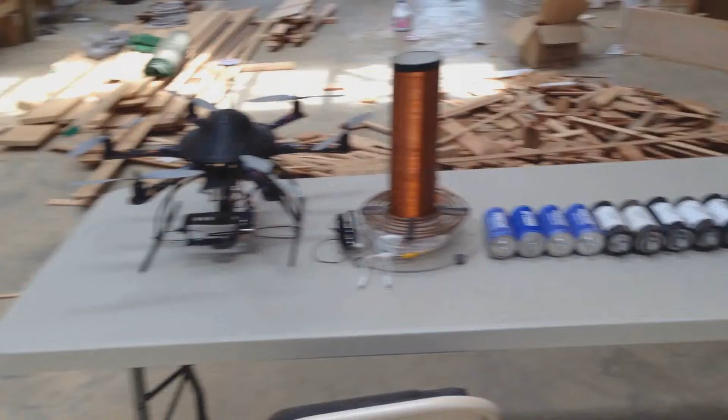Okay, so I'm really excited about this workspace here. There's a couple bays that I've got inside here, and I'm sharing this building with some other guys, and they're all great guys. The guy on that side of me, he wants to build solar on it over there. There's another guy here who builds organic farm tools to help with organic farming, and he's got all kinds of machinery and metal CNC machines, all kinds of stuff back there. But this is the space I'm setting up to work in. And I'm really excited because I've really been needing some workspace like this to take my projects to the next level.

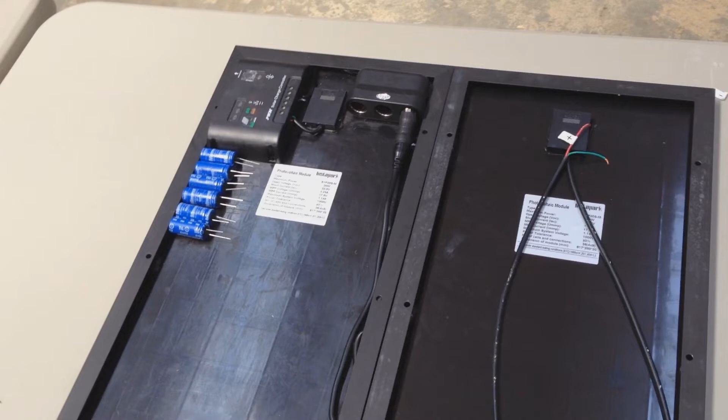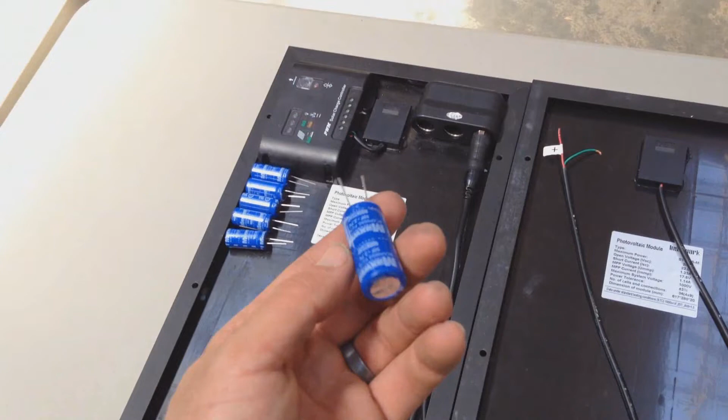Okay, so here's the beginning of the real-time solar project. What this is going to be is a couple 20-watt panels connected, and they'll fold up on each other. Inside I'm going to have a small boost pack using 2.7 volt 50 farad capacitors, boost caps from Maxwell, and they'll go inside there. I'm going to print a 3D housing case for those capacitors to hold them so I can connect them all in series and put them into the pack.

And over here I've got the 3D printer set up. I've got the computer. I'm going to go over the process of setting up a 3D print.

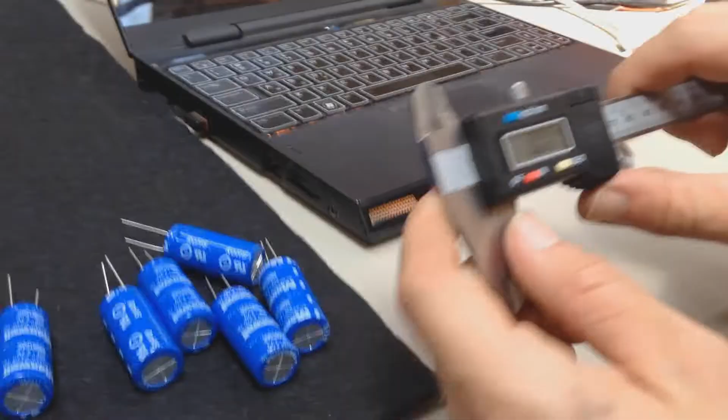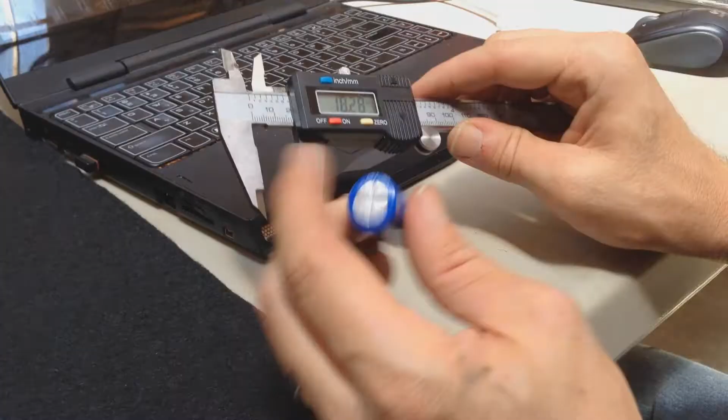Okay, so the first thing we want to do is set up the scale, and I'm going to be working in millimeters here. So we'll basically take one of these and we'll get the measurement on it. You can see here that this one's coming at 18.3 millimeters. So now that we got our measurement that way, we're 18.3 on the diameter of the cap. We're going to go ahead and get the length on the capacitors.

And they're, say, 40.7. Okay, so now that we're here inside 3ds Max, the first thing we need to do is create a cylinder to represent the capacitor. So I'm going to go ahead and lay that out here, and you'll see that the radius - we measured the actual diameter of the capacitor to be 18.3 millimeters, so we want a radius of half that. That'd be 9.15 on the radius, with a height of 40.7. So that sets - oh, whoa, that's way off. 40.7. So that represents our capacitor.

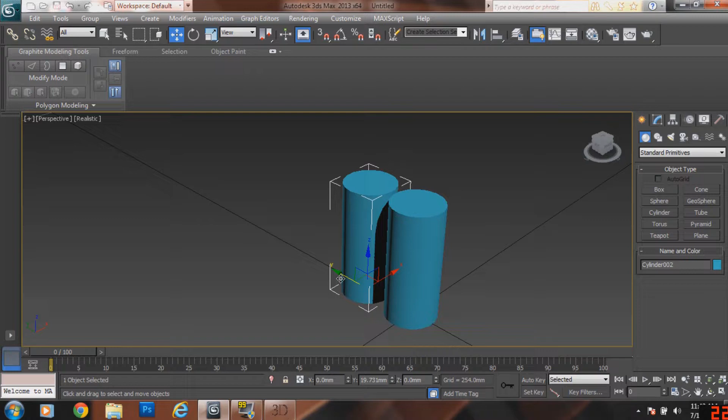So now that we've got our capacitor here, we can lay them out, and we'll go ahead and we'll create 6 of these little guys. So we'll leave a little space between them, but let's go ahead and do that, and we'll say that we want to copy out 5 more of them, and that gives us our 6 capacitors. So we've got that ready. I'm going to go ahead and just group those, and I'm going to call them caps. And now we've got our 6 capacitors. Let me just go ahead and center those up too. You can see that right now they're nowhere near center.

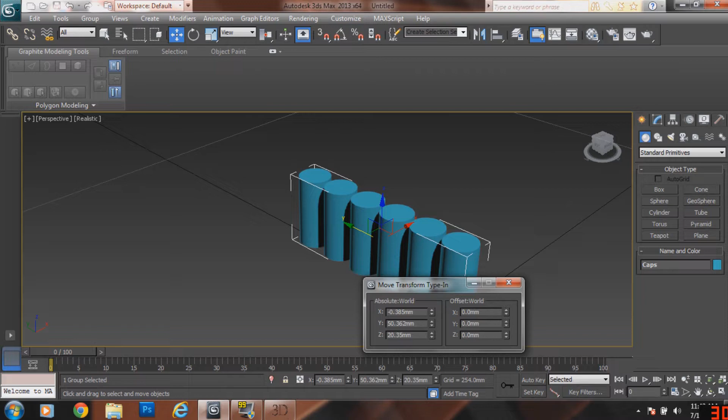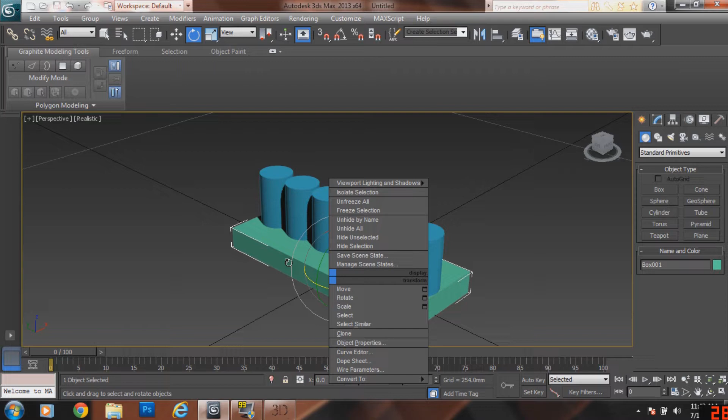Okay, so now that we've got our capacitors laid out, the next step will be to create the actual plastic part that we want to make. So I'm going to go ahead and create a just a basic box here. And we'll go ahead and we'll play with some of these distances. First thing we want to do is center the box, just like we did the capacitors. So we'll put that on 0. If you work off 0 on X, Y, and Z, it makes everything a whole lot easier. So now you can see that would be a pretty large chunk of plastic for the size capacitors.

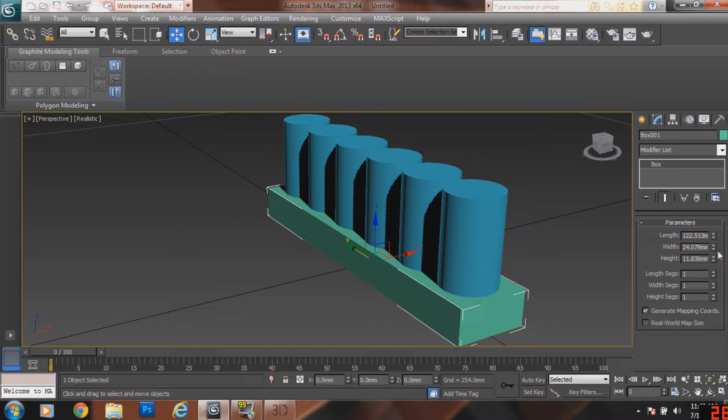So let's go ahead and experiment with this a little bit. We want just a little bit of plastic material around the edges to hold the capacitors, but we don't want this too thick because it has to fit in the profile of the solar panel. So, but it would be nice if it's large enough to be strong. So there's always trade-offs. But I think that looks pretty good. Alright, so that would be the base. And then height, of course we can play with the height on this. How thick do we want this? I don't think it needs to be all that thick, so let's go with something like that. Alright, so that looks good for the base.

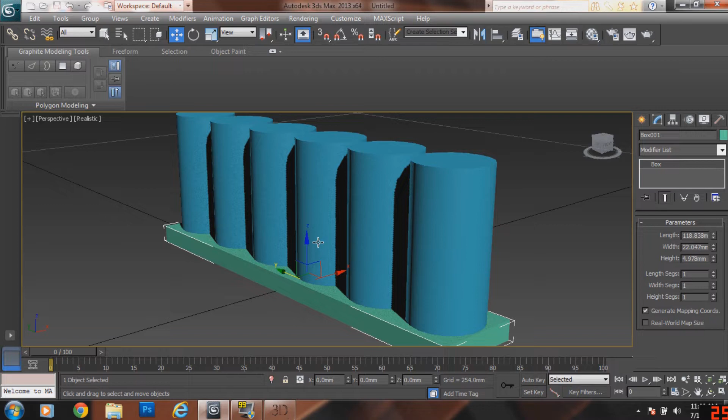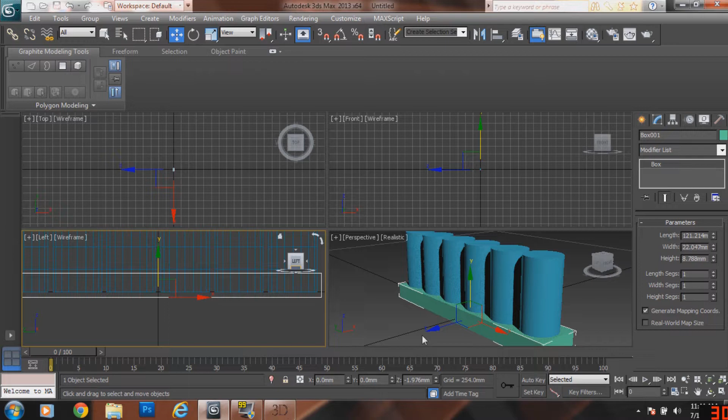Now one thing to notice, if we look in another view here, like the left view, you can see that we've got the base here, and the base comes to the same level as the capacitors, and we want to pull the base down just a little bit, so that the capacitors don't stick out through the bottom, and there's some actual plastic material there. So let's go ahead and give that a little more height and compensate for that. Alright, so we've got that. Let's go ahead and copy and paste this object up to here, so they'll have a top part and a bottom part. So now we got that in line. That's starting to look pretty good to me.

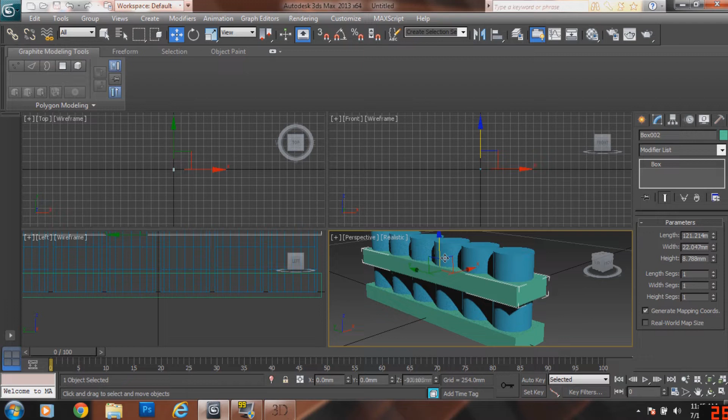Okay, so at this point, let me think about this. I'm real close to printing this. The only thing I'm concerned about is getting a little more strength out of this. Tell you what, let's go ahead and turn on the wireframe so we can see the wireframe as we work. And let's turn on some length segments. You can see the length segments there. And let's go for 5 length segments on the top and bottom here.

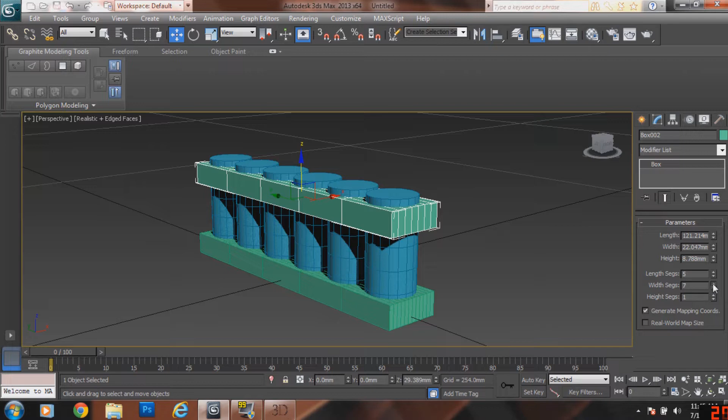Okay, so there we go. We got 5 length segments, and let's go ahead and do some width segments here. We'll bring these out until they get out to the edge, which is 12. So we're going to bring out 12 height and length segments.

You can see that object set up pretty well there. Now what we want to do is go into edit poly mode, and the first thing I'm going to do is attach the top box to the bottom box. I'm going to use the attach feature. Now they're attached. Now we'll go ahead and edit some faces.

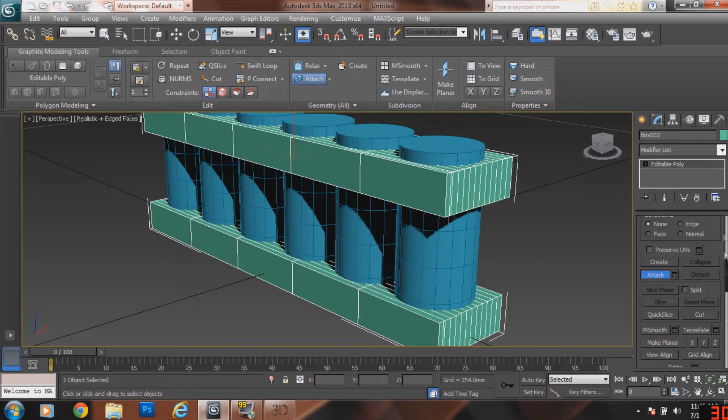So we got the bottom face there, and we'll go to the top face here, and let's see if we can bridge between those. There we go. So what we did is we really just connected the top and bottom faces, and I'm going to do that in a couple places, and that will just really make this strong. So let's do it again here.

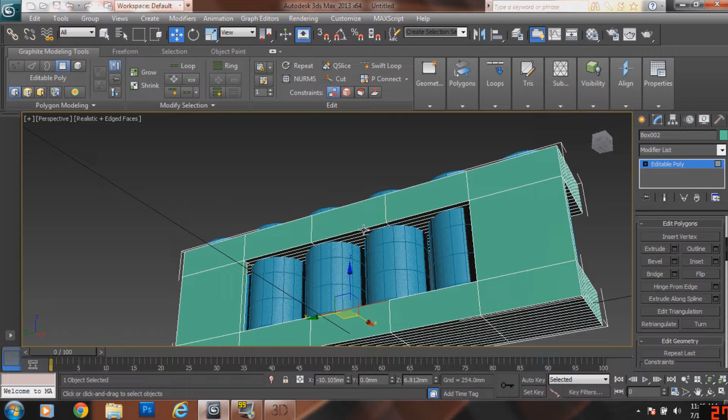Bridge. Alright, let's do it over here. We'll bridge that one, bridge it in the middle. And one more.

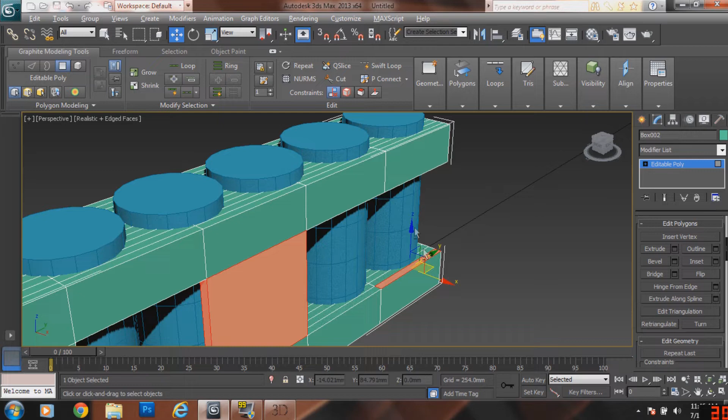And this little guy is almost ready to print here. So we'll bridge that. Alright, so the only problem at this point—let me go ahead and exit out of the polygon edit view here.

So the only problem at this point is when we remove these capacitors, you can see that we really just have a block of plastic, and we really want the plastic to hold these capacitors.

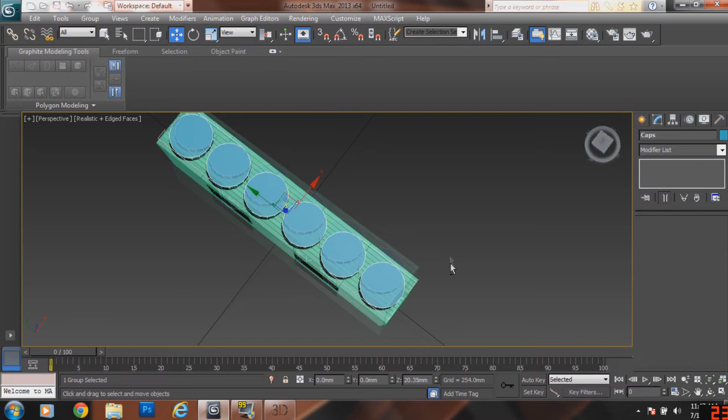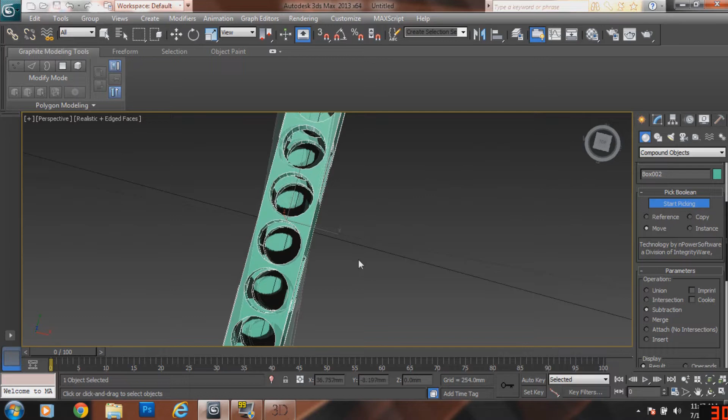So at this point, what I really need to do is something called a Boolean operation. All 3D software operates pretty much the same way, so the techniques you see me using here will be pretty much the same in other software. I'm going to go to Compound Objects, Boolean, and the type we want is a subtraction—it's already set there—so I can click the capacitors and it subtracts those out. And now we're set up. So that's an object ready to print.

Okay, so now that the part's ready, all we need to do is export it. We're going to export it as an STL file, and I'm going to put it in my 3D parts category, in the Real Time Boost Pack folder. We'll throw it in there. So let's go ahead and name this.

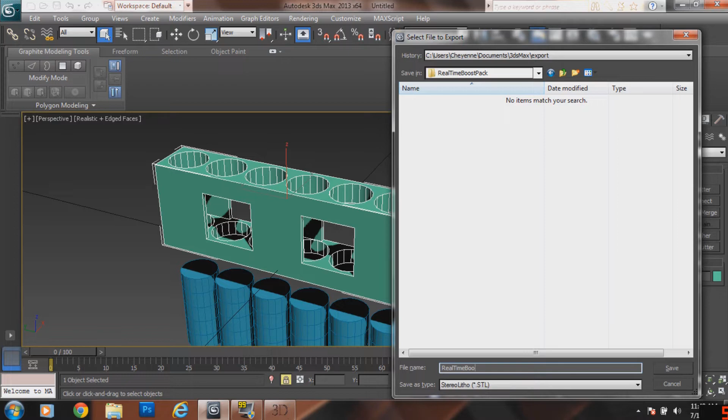We'll call it Real Time Boost Pack, and we'll save that STL. And if you come over here, this represents the 3D print space, this cube. We can open that part into there, and you'll see here it is, the STL part, and it lays it out right there on the space, ready to print.

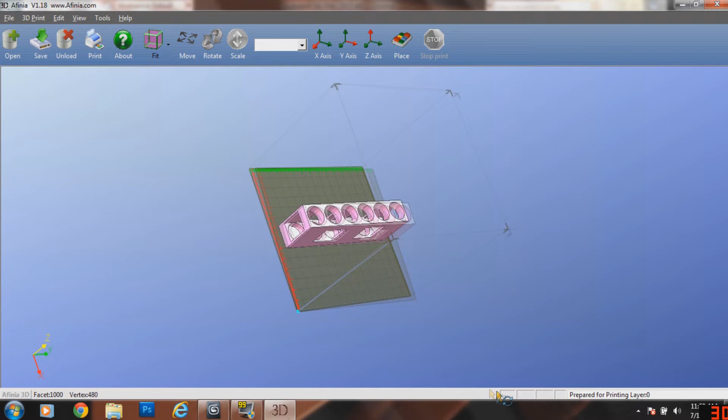Okay, so here's our little boost pack capacitor holder that we built up in 3D Studio Max, and all I really have to do here is basically hit print and go over a few settings, like the quality. On this one I'm going to do fast. Under preferences there's a few things like the fill material, but I'm going to leave all these on default. So let's go ahead and hit OK.

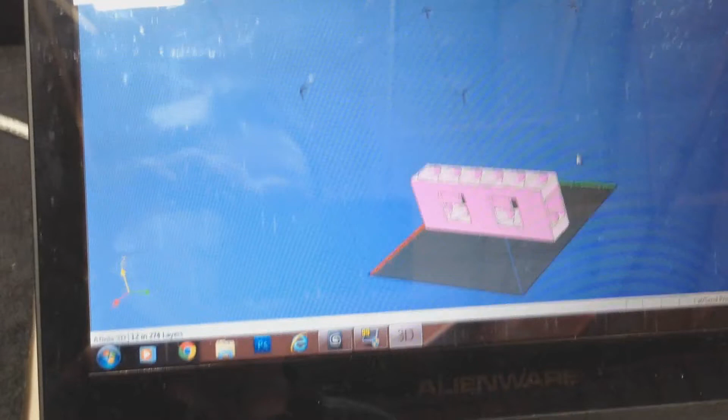Now what it's going to do, if you look down here in the lower corner, is calculate all the layers. There's 274 layers—it's basically slicing this object into a bunch of slices, and it'll print it down layer after layer. Then it's probably going to come up and say it doesn't think it has enough material, because I switched rolls. It actually keeps track of the weight on a roll, so it will alert you if you're beginning to run out. I switched rolls, so it thinks it's low, but we're not going to worry about that.

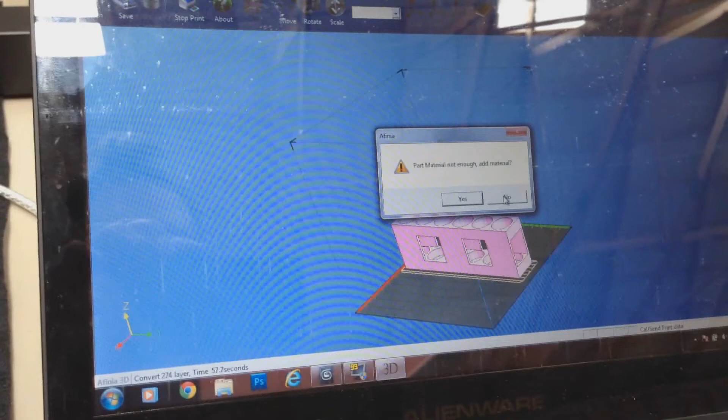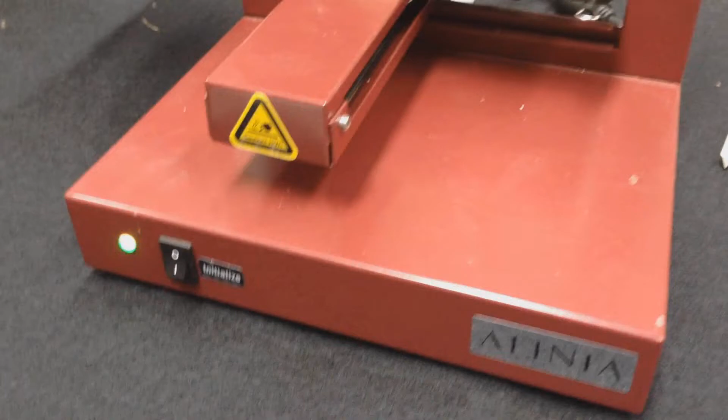Now what it's doing is sending the layers to the 3D printer, and that's what the blinking light over here is about. So as soon as it sends the layers over, I will turn the video back on and we'll watch it start to print.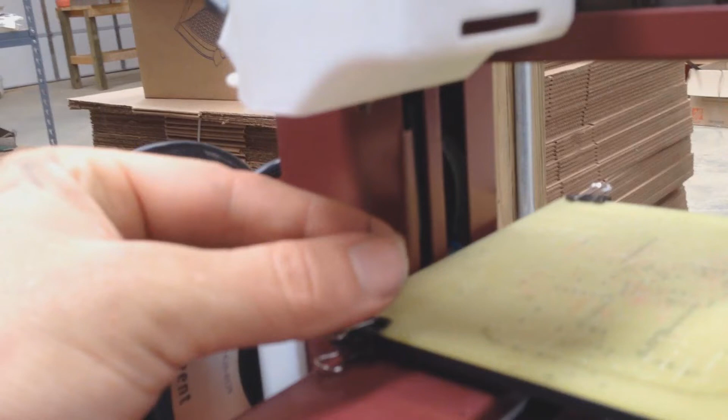Okay, so all the layers are sent over and it's bringing up the print tray. You can see some of the lines hanging off there—I'm just going to break that off. What it usually does first is lay down a little strip of material. That's what's going on right here.

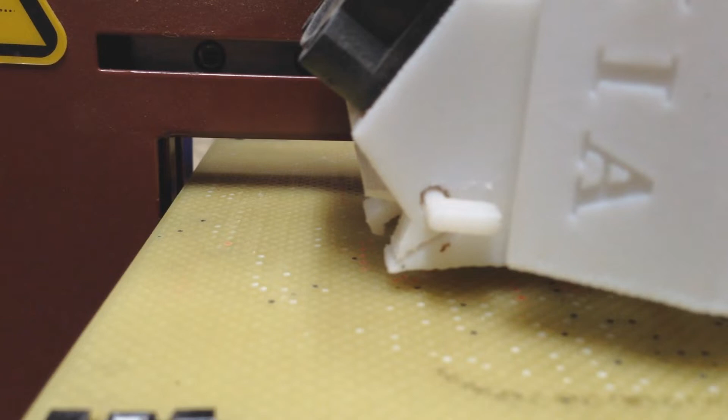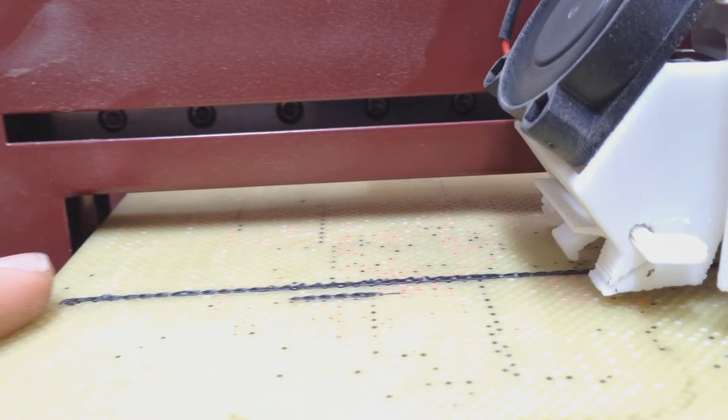And then it will lay down the rafting. The rafting is really what holds the model down on this perf board while it prints. If it doesn't do that, it can warp and come up on the edges, but with this rafting that it's laying down, that will hold the model down while it prints.

So that's the beginning of the process. We'll come back later and check it out.

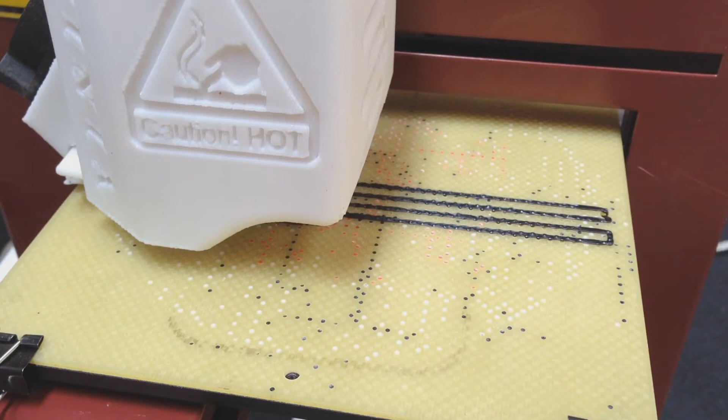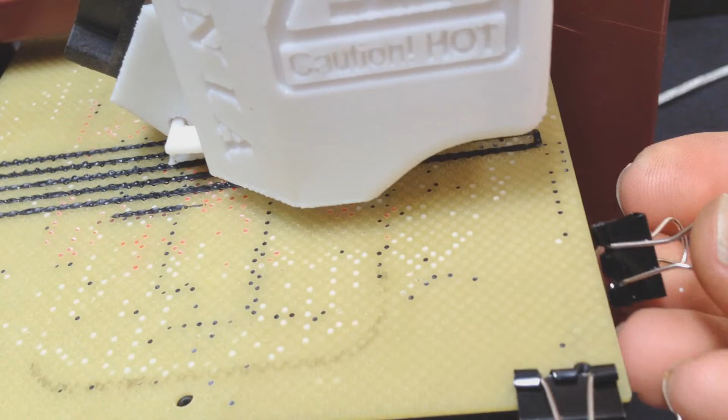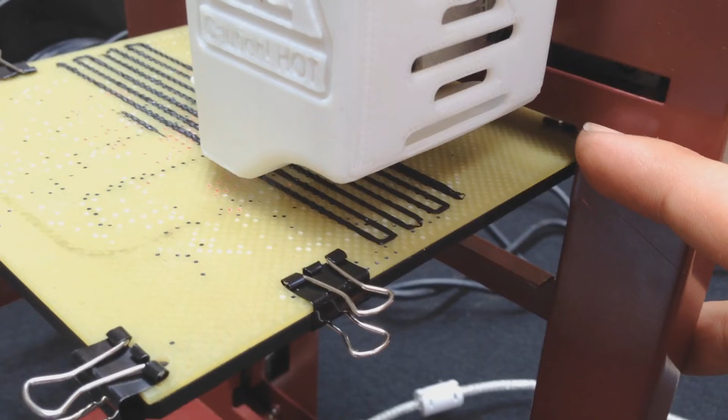One trick I've learned when printing something that spans the whole board like this: sometimes the center of the board wants to warp and bend up because the clamps are on the outer edges. If you're printing something along like this, and this is the farthest over this way that it's going to come, one thing you can do is put a couple clips here to help hold the board down. Depending on what you're printing, you may not want to do this, because the tray will sometimes shoot all the way back this way, and those clamps would hit this support. But in this case, it's never going to move back past these clips, so as long as the clips are just this side of it, everything should be fine.

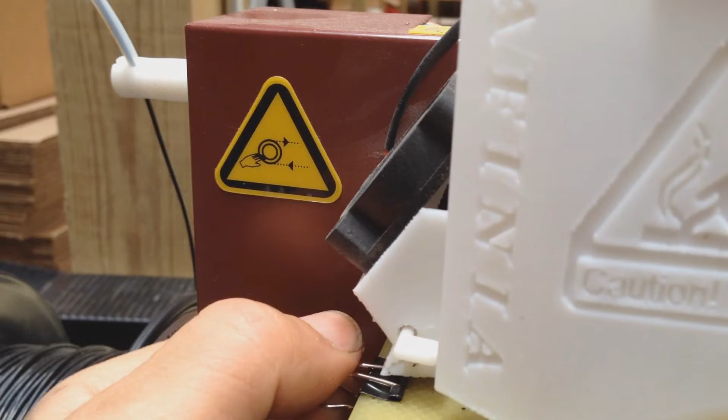Alright, this is printing along here. One of the nice things about this particular printer, the Afinia printer, is that I can unplug it from the computer and it will carry on its print process. So I'm going to pack up here, run home, have lunch, and come back and check this after lunch.

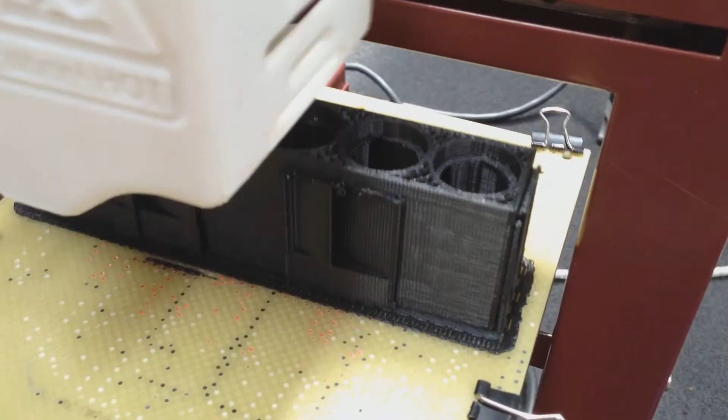Okay, so I've ended up in a situation here where there's no more filament coming out of my nozzle. I've had this issue with this filament - this is the third time this Octave 3D printer filament has had a bulge in it, and the bulge gets stuck in the extruder. So anyway, I'm going to go ahead and turn off the print now.

And this is actually functional and usable. It's just going to have kind of this, just in here.

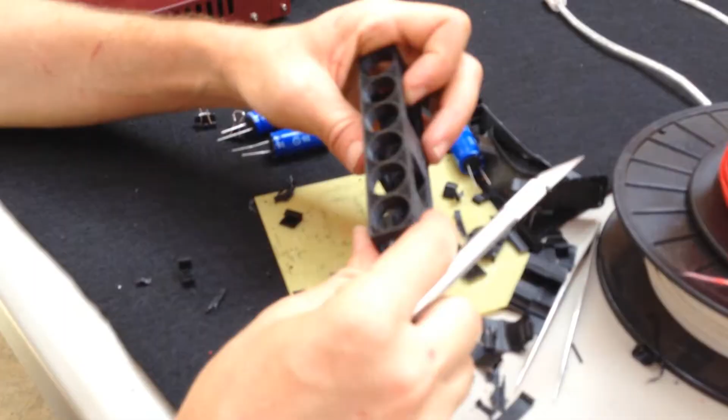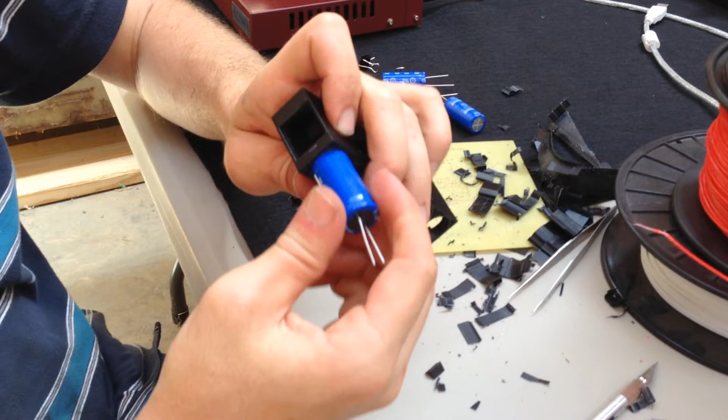Alright, so when I press this in here, I can see that even though we gave a little bit of extra slack, the fit is really, really tight. Let me try one of the other ones here. So I could probably force these in and get this to work, but I might chance cracking something.

So what I think I'm going to do is remove - these capacitors have a heat shrink covering, and I'm just going to remove that covering, and then I believe these will go in just fine. The only thing you have to remember is that the negative is the shorter leg. So yeah, with the covering removed, this is a perfect fit, and there.

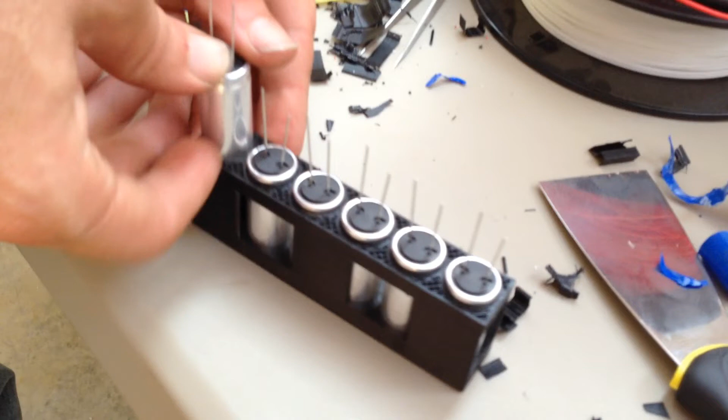So that's it, we'll get the rest of them in there, and then I'll solder them together and we'll try this out. Okay, so this is the last capacitor, and I'll go ahead and get these all soldered in series. But you know what?

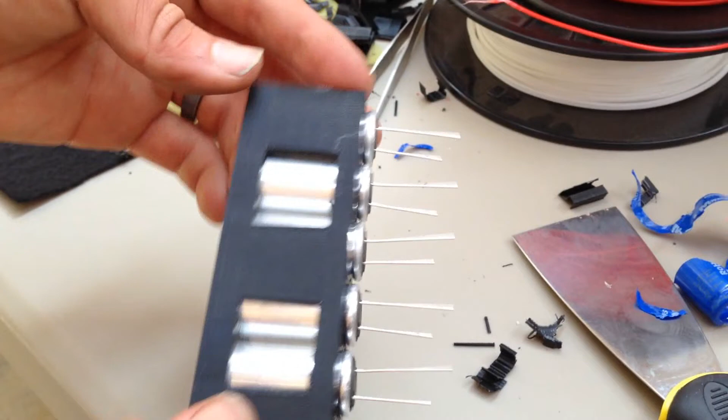Looking at this now, I don't think this top pattern even looks that bad, I think it looks kind of cool. So if the other was a mini boost pack, I guess this is a micro or a nano boost pack. But I'll get these soldered together, and we'll have the negative off this side and the positive off this side, and we'll test this out.

So we're going to connect up the positive and negative leads on this, and I'm going to connect to the short leg, the negative. You just want to do one and then do the other, because you really don't want to mess up on your polarity in something like this.

Okay, so we've got our positive and negative leads on here. I'm just going to go ahead and prep the ends here a little bit.

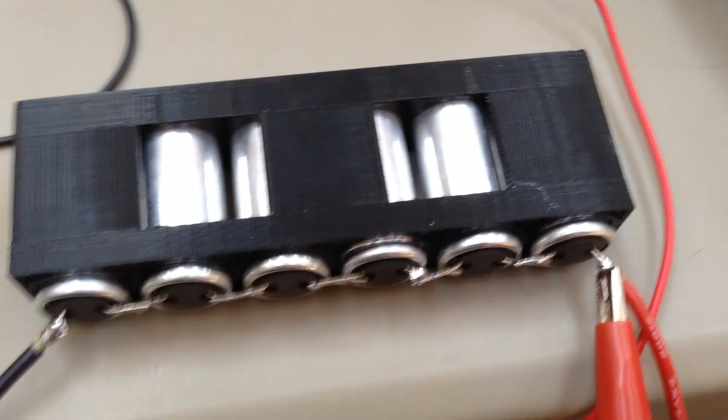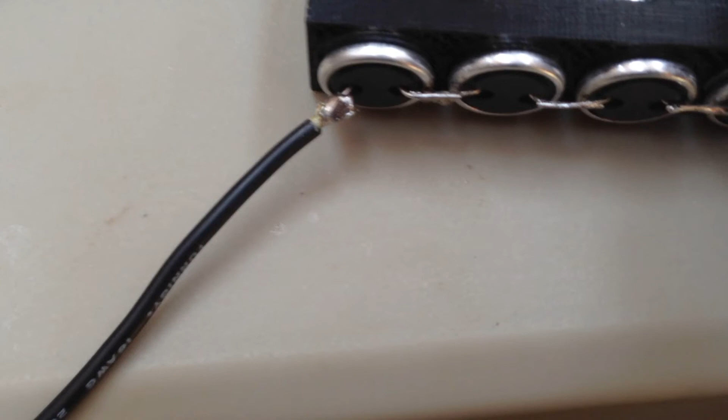Okay, so I started to charge this up on my power supply, and I was checking the voltage between the cells, and I noticed some of them were not balancing, and I figured out why. I'm used to working with these that have an insulated cover, and you can see that some of the leads were actually touching the aluminum casing, and that was shorting them out, not letting them charge up correctly. So I went ahead and reheated the solder, and I left enough space for me to get my X-Acto blade between the casing and the covering. I'll insert an insulator in there later, but right now I just want to charge this up and do some tests with it.

But that's something to note: if you ever take the insulation off a capacitor, you may end up in a situation where one of the leads shorts to the case. And as we know from the CapTra experiments, that can actually short out a capacitor.